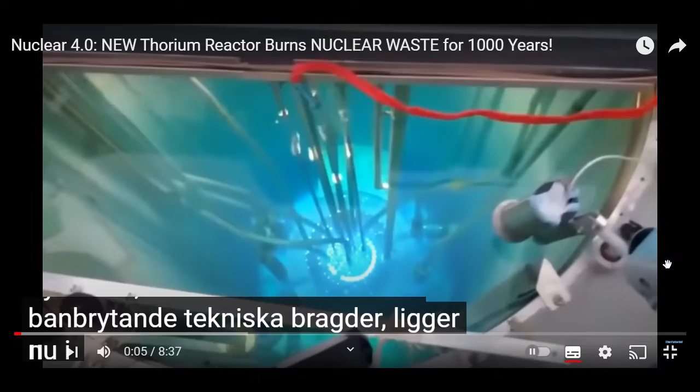Germany, a nation known for its groundbreaking technological feats, is now at the forefront of a nuclear revolution that could completely change the future of our entire planet. The fact that Germany was the first country to abandon nuclear energy has led to an unexpected yet enlightening outcome. The ongoing war in Ukraine and sanctions against cheap Russian gas have pushed the country into a severe energy crisis, posing challenges to the country's economy and calling into question its nuclear phase-out.

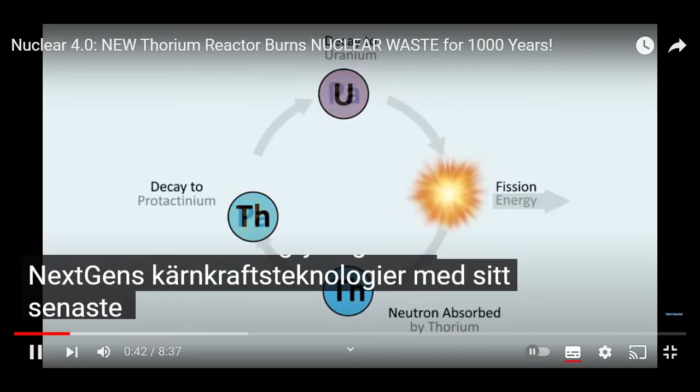However, though Germany is phasing out nuclear power, the nation is still leading in nuclear technologies. And now it is witnessing the dawn of next-gen nuclear technologies with its latest thorium reactor breakthrough. Introducing the dual-fluid reactor, a groundbreaking new thorium molten salt reactor design that is game-changing for several reasons.

While traditional nuclear plants use a more than 50-year-old technology based on uranium, the next generation of nuclear reactors is harnessing thorium, an element much more powerful and abundant than uranium. With only 1 ton of thorium, it is possible to generate the same amount of energy as 200 tons of uranium, and a dangerous meltdown is physically impossible.

But what makes this new reactor truly amazing is the fact that it can burn nuclear waste. And by untapping this resource and commercializing nuclear waste, this new thorium molten salt reactor could supply our entire world with clean and safe nuclear energy for up to 1,000 years. So what is this new reactor all about? How does it work? And what does it mean for the future of our planet? We have everything you need to know covered in this video.

Germany was once home to the most powerful and efficient nuclear reactors. However, the risk of a nuclear meltdown, as well as the repository problem of nuclear waste, led the country to shut down its last active reactors. But the sanctions against Russian gas, and ironically, the decision of Germany's Environment Party, has resulted in the country putting coal-fired power plants, the most polluting fossil fuel source, back into operation.

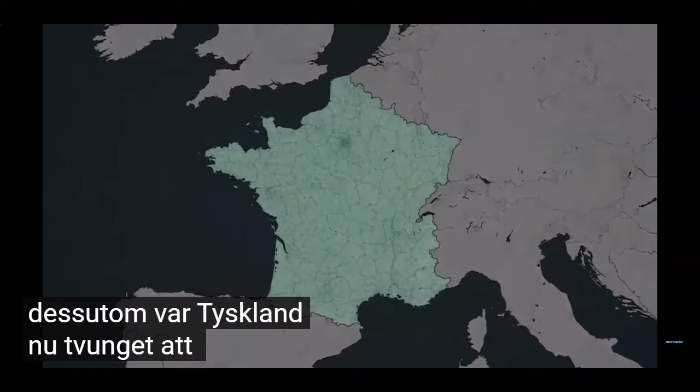Additionally, Germany now had to rely on energy imports from neighboring countries like France, which generates over 60% of its energy from nuclear power. So while Germany was still dependent on nuclear power, its economy began to crumble due to expensive energy imports. This is a perfect example that a baseload-capable renewable energy grid is not possible with solar and wind alone. Fortunately, the next generation of nuclear reactors are an excellent option for safe and clean nuclear power supply.

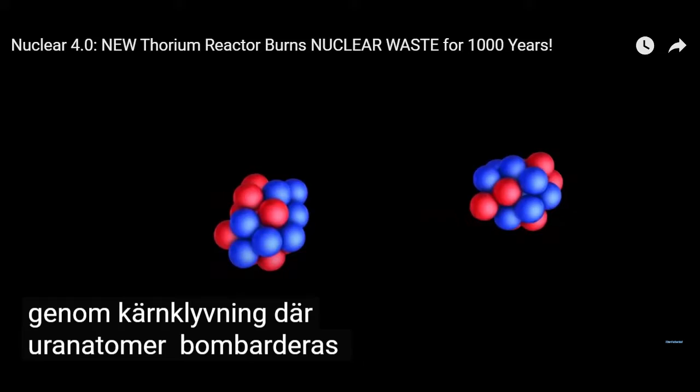So how does the dual-fluid reactor work? Traditional nuclear plants work through nuclear fission, where uranium atoms are bombarded with neutrons, causing them to split and release tremendous amounts of energy, leading to a chain reaction in the fission process. Continued release of energy heats water, creating steam that drives turbines to generate electricity.

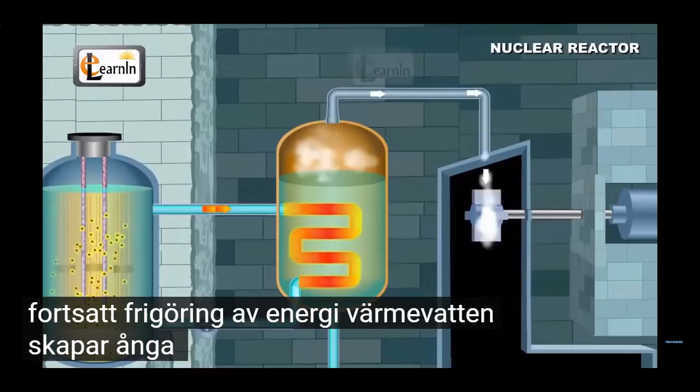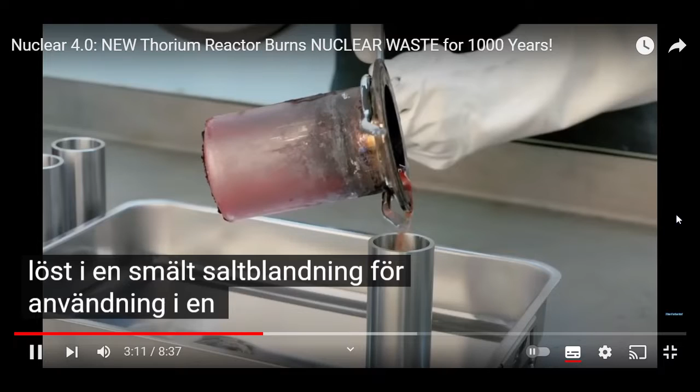But while traditional nuclear plants use solid materials as fuel rods, the fuel is dissolved in a molten salt mixture for use in a dual-fluid reactor. Dual fluid means 2 fluids form the plant's core. One contains the fuel, and the other acts as a coolant. Any fissile materials can be used as fuel, from conventional materials like uranium to thorium, and even nuclear waste.

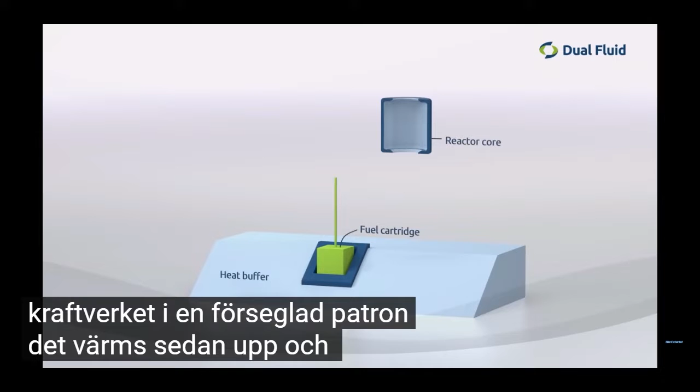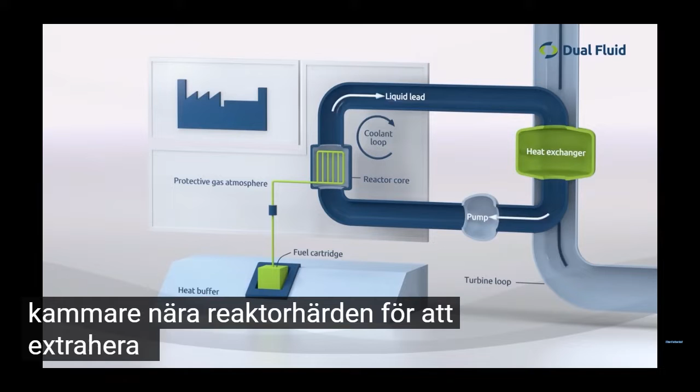The liquefied fuel is delivered to the power station in a sealed cartridge. It is then heated and pumped into the reactor, generating even more energy as the fission process begins. The liquid lead flows in an entirely separate chamber close to the reactor core to extract the heat efficiently. The lead then carries the heat to a separated turbine loop to exchange heat again for the energy generation process.

So the dual-fluid reactor can not only harness thorium, which is 3 to 4 times more abundant than uranium, but it can also turn nuclear waste into electricity, which is groundbreaking for several reasons. The main reason is that current nuclear plants produce high-level nuclear waste, which remains radioactive and hazardous for more than 100,000 years and has to be disposed of properly.

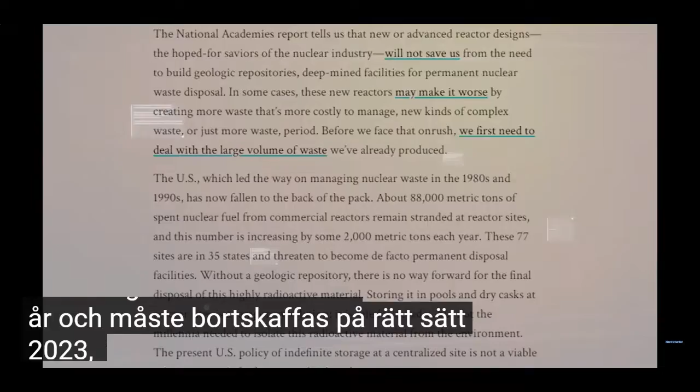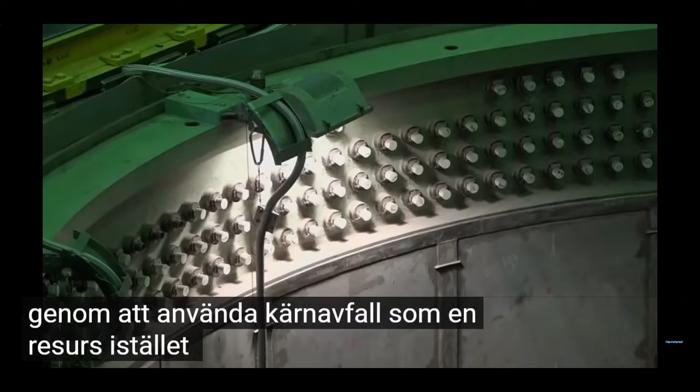In 2023, the United States accumulated about 88,000 metric tons of highly radioactive waste. As there are still no plans for managing and disposing of spent nuclear fuel, the nuclear waste in the United States is piling up in those plants, leading to a huge safety problem. However, by utilizing nuclear waste as a resource instead of managing its disposal, this new technology could supply the United States for up to 1,000 years with cheap, clean nuclear energy.

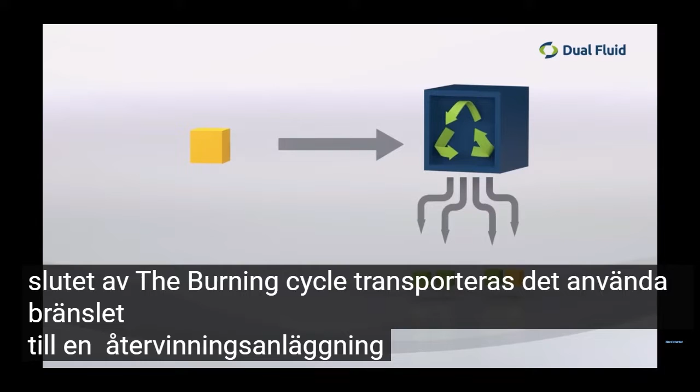And that wasn't even all. According to the company, the liquefied fuel can operate for about 25 years. But at the end of the burning cycle, the spent fuel is transported to a recycling facility, where still fissionable materials are returned to the reactor to be burned again, significantly increasing fuel efficiency. The residual radioactive materials become less harmful than natural uranium in 300 years.

Furthermore, the new reactor is considered extremely safe, and catastrophic meltdown situations like Chernobyl and Fukushima are physically impossible. The reactor can never overheat, as the laws of nature work in its favor. If the temperature increases, the liquid fuel expands. As a result, the reactivity of the fission process automatically decreases, creating a self-regulating feedback loop.

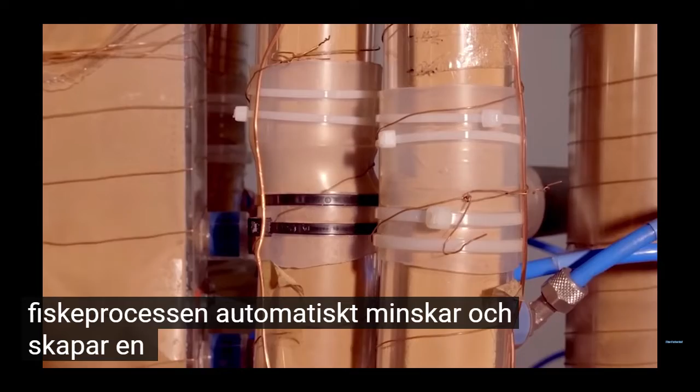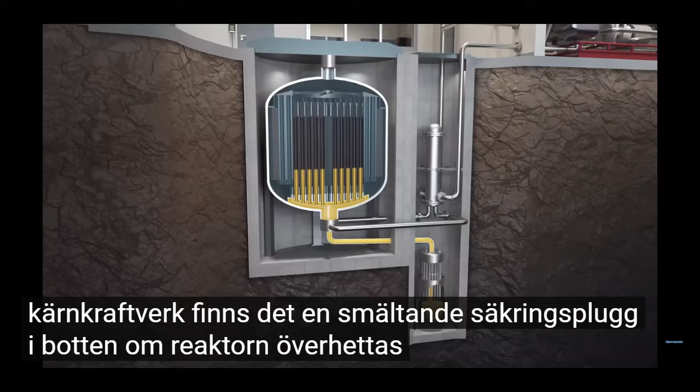An additional safety feature enables using this reactor even in hazardous regions such as earthquake or tsunami areas, typically unsuitable for nuclear power plants. There's a melting fuse plug at the bottom. If the reactor overheats, the plug melts, and the liquid fuel drains into a separate passive cooling tank where the nuclear chain reaction stops immediately.

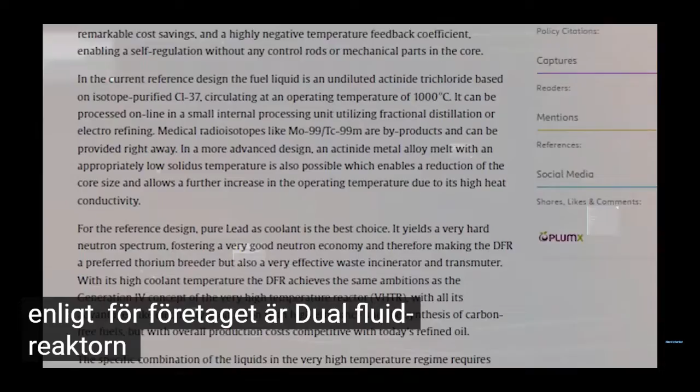According to the company, the dual-fluid reactor is incredibly efficient and delivers up to 20 times more energy than current nuclear reactors. Unlike traditional nuclear plants, which can take up huge spaces and take decades to build, the dual-fluid is also designed as a small modular reactor, making it much more scalable and affordable.

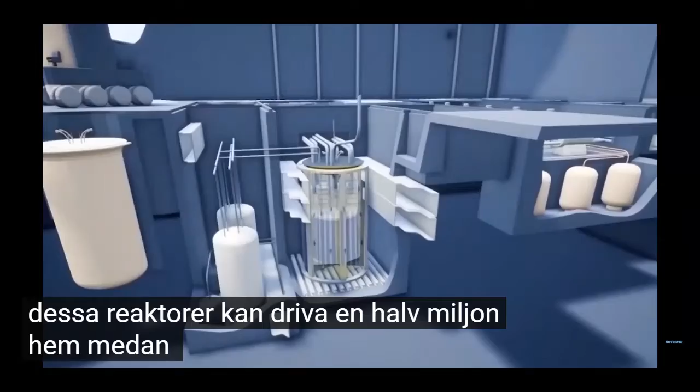Just one of these reactors can power 500,000 homes, while several small reactor cores can be used to replace a large power station. With this new thorium reactor, German engineers have marked a major milestone for the next generation of nuclear technologies. I know what you're thinking. It sounds way too good to be true. So what's the catch of the story?

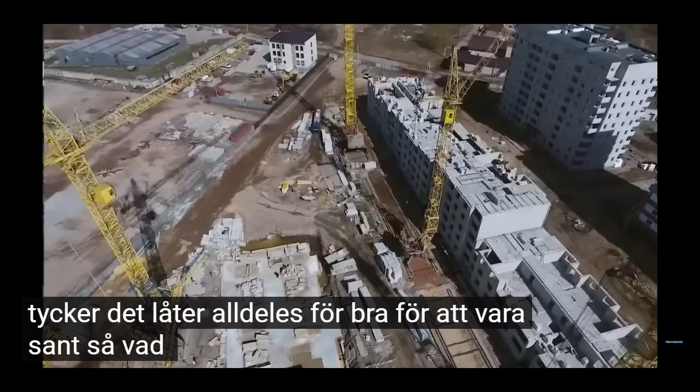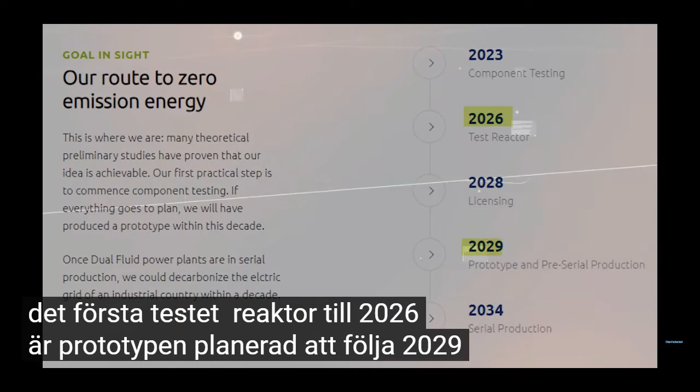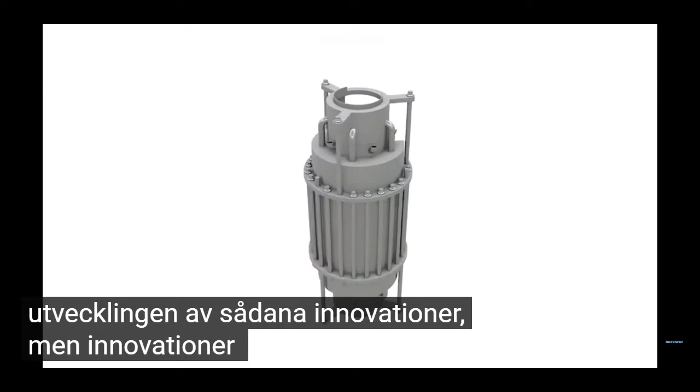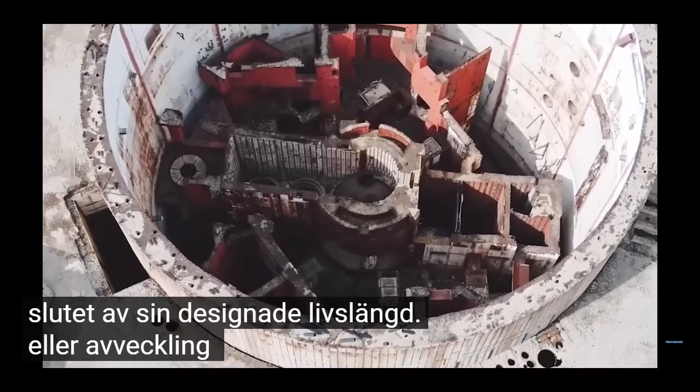Interestingly enough, the first test reactor will not be built in Germany, but in Rwanda. Bureaucratic hurdles and a lack of government funding are hindering the development of such innovations. However, innovations like the dual-fluid reactor are inevitable. That's because the importance of clean, carbon-neutral energy is significantly increasing in the global economy, while many existing nuclear power plants are reaching the end of their designed operational life. Updating, maintaining, or decommissioning these aging reactors presents technical, economic, and environmental challenges.

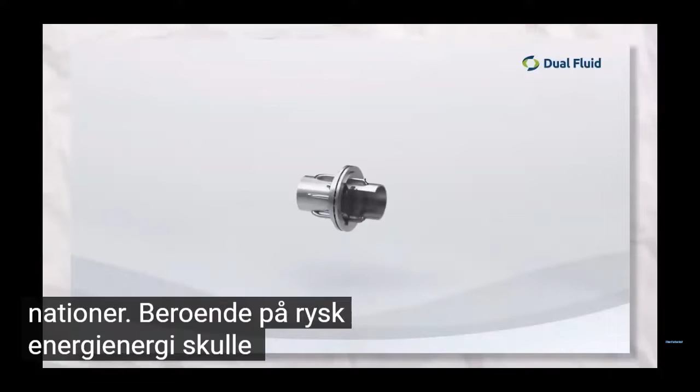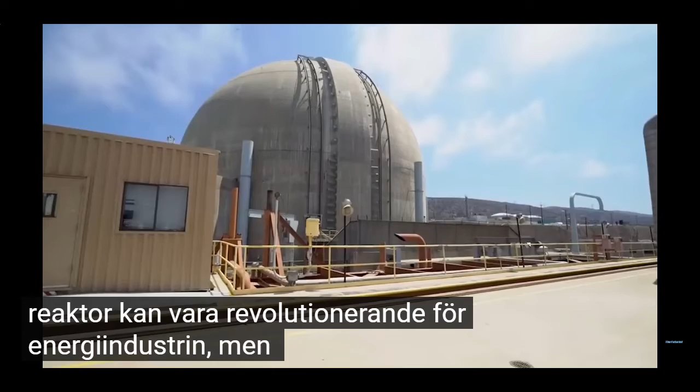Furthermore, conflicts like the Russian-Ukraine war led to a massive surge in energy prices and showcased European nations' reliance on Russian energy. The dual-fluid reactor would be a perfect alternative to decouple from Russian gas. It is a carbon-free energy source that is in high demand and a safe and clean alternative to conventional nuclear power plants. The success of this reactor could be revolutionary for the energy industry, but unfortunately, the United States is not supporting the fourth generation of nuclear reactors.

Meanwhile, China has already launched its first thorium molten salt reactor, taking the lead in advanced nuclear technologies. Is China leaving the West behind?